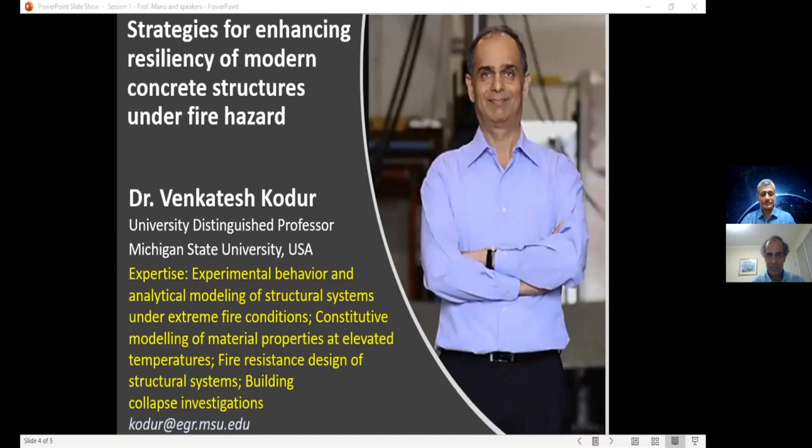Professor Kodur? Yes, can you hear me? Yes, very much. Yeah, sure. Okay, so let me go and share my screen.

Can you see the screen now? Yes, that's correct, we can see it. You can just put it on slideshow mode. Yeah, fine, that's perfect, thank you. Perfect, good, okay, so just one.

Okay, I don't want to say good morning or good afternoon, we are all in different time zones, and I am in Michigan, United States, where it's just past midnight right now, it's 12:30 a.m. So first of all, I would like to thank Professor Gettu, as well as Rilem and Gettu's colleagues, Manu Santhanam and others, for organizing this workshop, as well as for inviting me to be part of it.

So the title, Manu, can you hear me? Yeah, I can hear you. It's clear, sure. So the title of my presentation is on strategies for enhancing resiliency of modern concrete structures under fire hazard. The buzzwords here are resiliency, obviously, modern concrete structures, and fire hazard. So those three are the buzzwords here.

So what I'm going to do today is to just give you some background information on the overall importance of fire safety, specifically mostly in buildings, but in infrastructure, critical infrastructure. Then I'm going to also look at resiliency, why resiliency is much more important in the current or the modern concrete structures as opposed to structures 30 years ago. I'm going to look into that.

And I will illustrate, in addition to that, some of the fire statistics, we call it, to see the magnitude of the fire problem itself around the world. After that, I will move on to a brief mention of various experimental and numerical studies we have carried out to develop techniques and technologies to overcome the fire problems with respect to especially the new concretes. I'm going to discuss some of the critical parameters, and finally at the end, I'm going to quickly point out some of the innovative strategies that can be implemented even in new concretes and new structures to overcome not only the fire problem, but also how we can enhance resiliency.

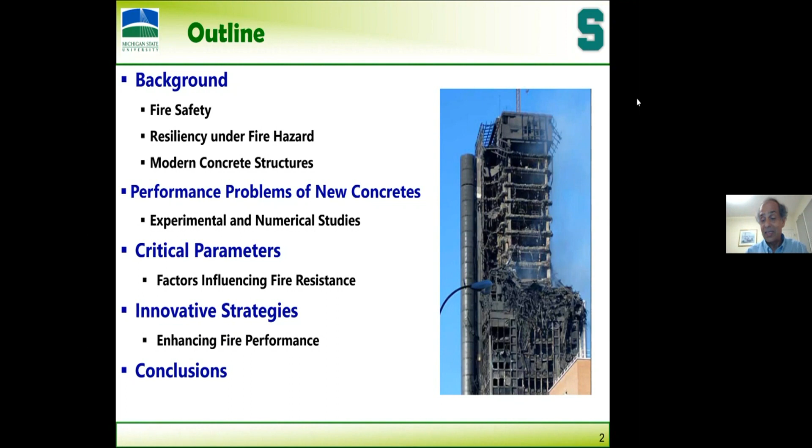As we all know, concrete is the most widely used construction material in most countries, if not all countries around the world. And there are a number of advantages. A lot of times all these advantages are taught very well, even in early concrete courses. But one of them, which is conveniently forgotten, is...

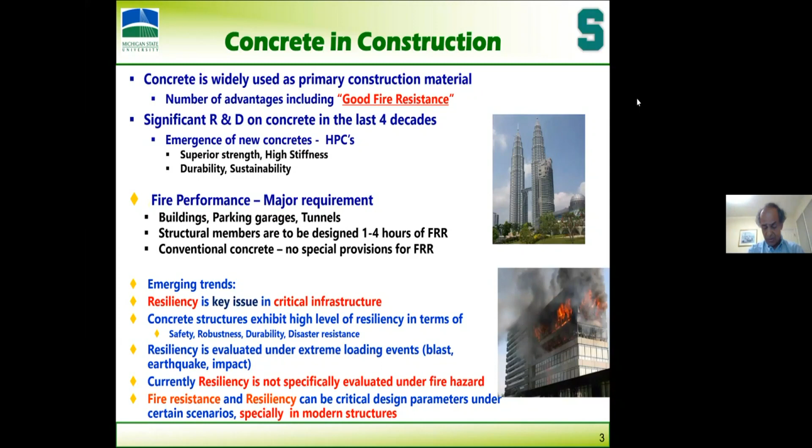It was started because timber or steel has a lot of significant problems with fire resistance. I will define what fire resistance is. So one of the best materials from a fire safety point of view is concrete for structural members. That's why it's widely used as well. There has been significant research and development activity with respect to concrete, especially from the material point of view.

And this has led to a lot of new concretes, such as high-performance concretes, high-strength concretes, ultra-high-performance concrete, fiber-reinforced concrete. Much of these concretes provide very good strength, stiffness, durability, sustainability, you name it, much of the needed properties. However, with the recent concretes, one of the problems is fire, which we will come to in a second.

Before that, fire is a major hazard in the built infrastructure, and especially in buildings because of the life safety requirements. Fire poses a significant hazard and threat to the built environment. And conventional concretes usually have much higher mass and much higher fire resistance, but the same is not true with the new types of concrete, which I'll show you quickly.

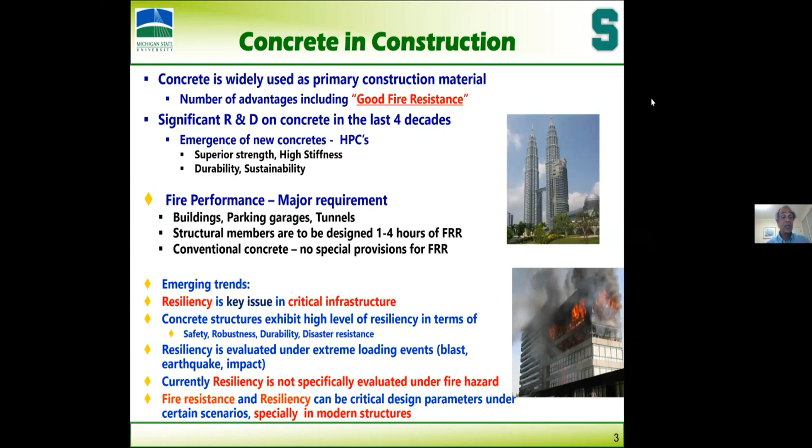Now, the emerging trend over the last 30, 40 years, in most parts of the world, is that resiliency is the key buzzword for critical infrastructure. This includes buildings, bridges, tunnels, whichever we classify as critical especially. So concrete structures exhibit very high levels of resiliency in terms of safety, robustness, disaster resiliency of the different materials.

However, today, in the current way of doing things, we evaluate this resiliency, or check for this resiliency, in critical infrastructure, especially under blast, earthquake, impact, but we don't do it even for the basic things under fire hazard. It's all based on the prescriptive approaches developed 40, 50 years ago, which are present in the codes and standards.

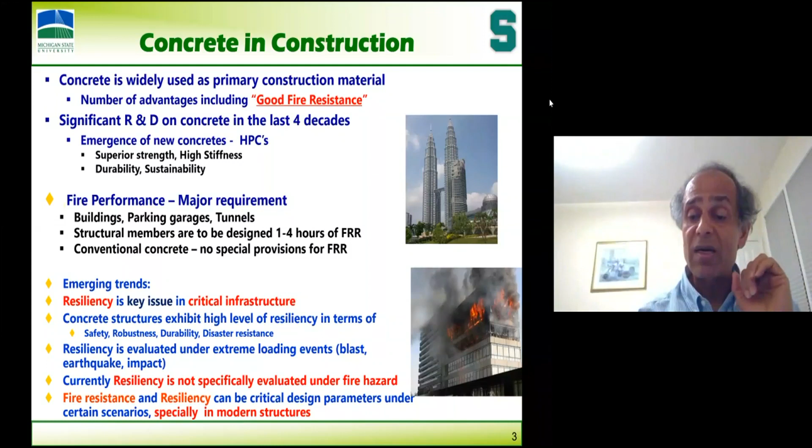It's not in any country, even in the US, for example. These are all tests based on a single test done on columns at Underwriter Laboratories or NRC Canada. Still, we continue to use those provisions which are not really applicable for modern construction. So fire resistance, and basically since we don't evaluate this resiliency specifically under fire hazard, modern concrete structures are susceptible to problems, especially under fire.

Now, I don't want to spend too much time. Fire, as you all know, is a significant hazard in terms of statistics, not only for people but also for infrastructure or structures. This is some of the statistics. In the US, there were more than 1.3 million fires that led to more than $50 billion of damage in 2017, almost about 2% of our GDP.

Now, when fire happens, remember it can start if something goes out of control. Either lightning can start a fire on a bridge, for example, or something going out of control in a kitchen can start an accidental fire, electric short circuit. That's a primary event. Also, fire can start following a blast happening somewhere or an impact. A truck hits a bridge, that impact doesn't do much damage. The bridge is designed for that, but it's not designed for the fire which follows that.

9/11, the buildings were designed to account for the impact loading of a smaller aircraft, not that aircraft. I was part of that investigation, and when we looked at it, it was never designed to account for the fires that ensued the impact loading. Similarly, even floods can lead to fires, as happened in New Jersey in 2012 during Hurricane Sandy. So as a secondary event, fire can do much more damage than the primary event itself.

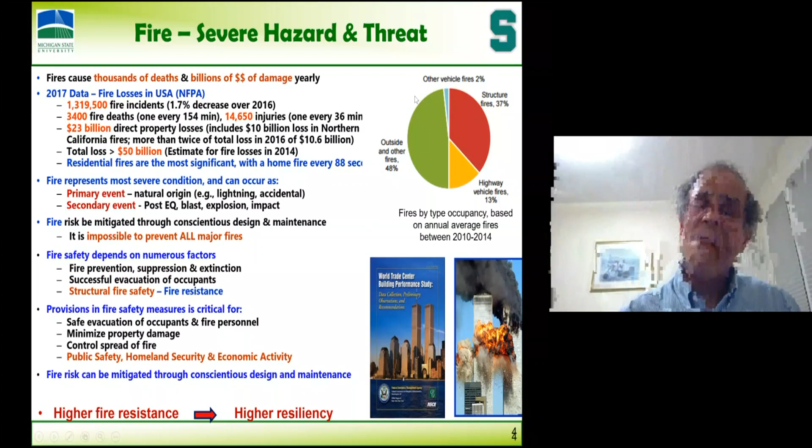Now, there are a number of fires around the world. These are some of the recent fires in the United States. For example, the damages which happened in November 2018 California wildfires is more than $3 billion for structures, and more than $26 billion of insurance was paid out because of that. This was not major structures because it was outside the towns, but there was some kind of damage to some structures as well.

Now, in addition to that, 9/11, obviously you all know much more about this. There were bridge fires in the United States, tunnel fires, for example, warehouse fires. So fires do happen, like the Oakland warehouse fire, where 36 people died, again in Oakland, California. And in this case also, there was significant structural damage.

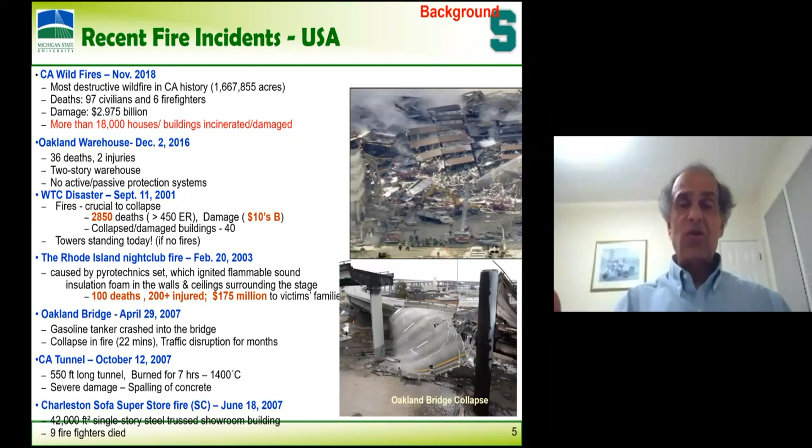Now, I'll just illustrate quickly, there's not much time in today's presentation, but quickly illustrate how things can go wrong. This is the I-85 bridge outside of Atlanta, Georgia, near Atlanta airport. On a fine spring day in 2017, what happened was they put in underneath the bridge, for drainage repair, a lot of pipes, PVC, polyvinyl chloride pipes. And then they left it and went, because they wanted to start the work in late April or May. All these pipes were left there.

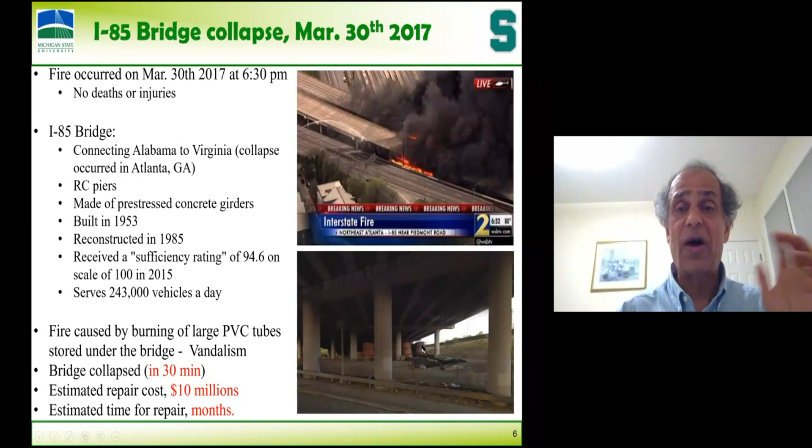A homeless person, on a cold evening, comes in and sets fire to all the rubble or paper which was around it. And then that goes out of control and spreads into the pipes, and a huge fire starts. Look at this fire — the fire department, because it was closer to the city, Atlanta, a lot of fire engines or firefighting trucks came, but it couldn't be fought. They had to withdraw because of significant spalling. You can see here the rebars completely exposed, and spans of the bridge collapsed.

You won't believe how much damage. Delta had to cancel about 1,000 flights over the next 3 days or more because nobody could get to work — all the flights. That's the hub of Delta, the world's largest airport, basically. So I think that's the kind of damage that can happen, and it took weeks for the bridge to be rebuilt. There are a number of buildings like this.

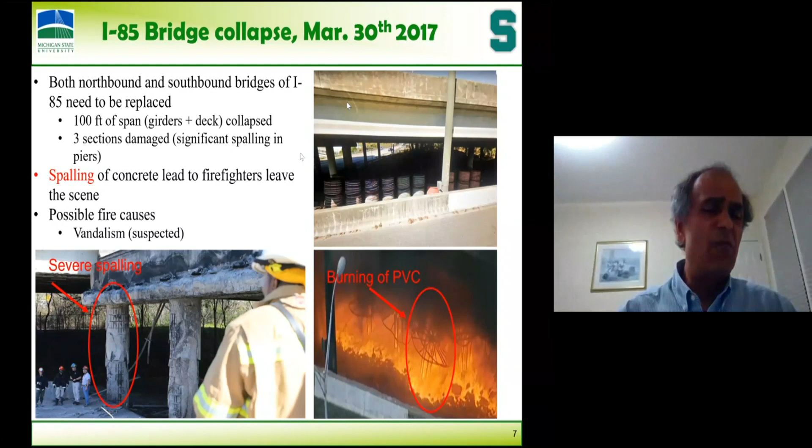I can name hundreds of buildings which were on fire in the last 5 years. Important buildings: in Tehran, the Plasco building, a 17-story building, collapsed. A number of firefighters died as well as people. Grenfell Tower, you know what happened there, a concrete building. The first one was a steel building.

I was part of the investigation at Delft University of Architecture, a university building, 13-story building which collapsed because fire started due to an electric short circuit in a coffee vending machine which was not turned off. So there are a number of fires in buildings, it's a real hazard which we are looking at.

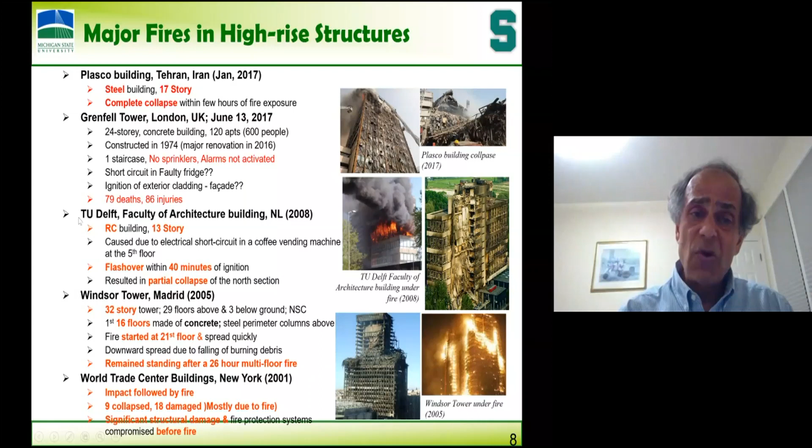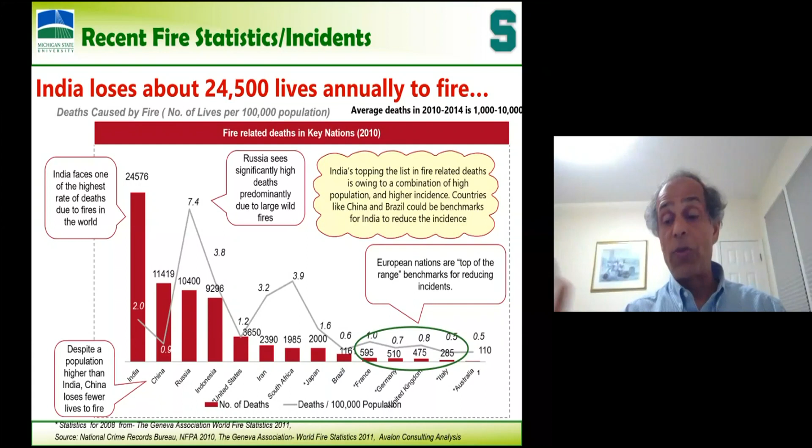If you look at the world statistics, India especially has the worst fire record. Nearly 24,000 people die every year because of fire incidents. It may not be due to structural damage, but fire as a whole has to be considered a hazard. A lot of times smoke is the one which kills more people than anything to do with the structure itself.

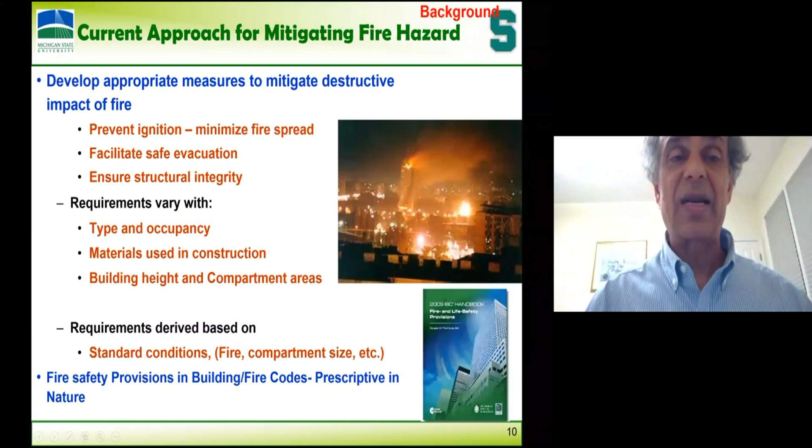How does the current code address this? Current codes address this by putting in a lot of fire protection measures, and this depends on the height of the building and the type of occupancy. For example, if you have buildings with old age people or hospitals, you obviously need to provide higher fire resistance, it should stay longer than an office building. These are put in place in the building codes, including in India, and every other country has this. Without that, you cannot get a permit for the building.

What are the fire safety strategies? We put in a lot of measures, sprinklers - fire comes out, it should be put out by sprinklers automatically. Most new buildings in the United States are sprinklered, but often sprinklers are not effective, so people have to be sent out. Then you have fire contained to the source of origin in one compartment, one room or two rooms, through barriers, or your structure has to stand up until the fire is fought. This is what is called fire resistance.

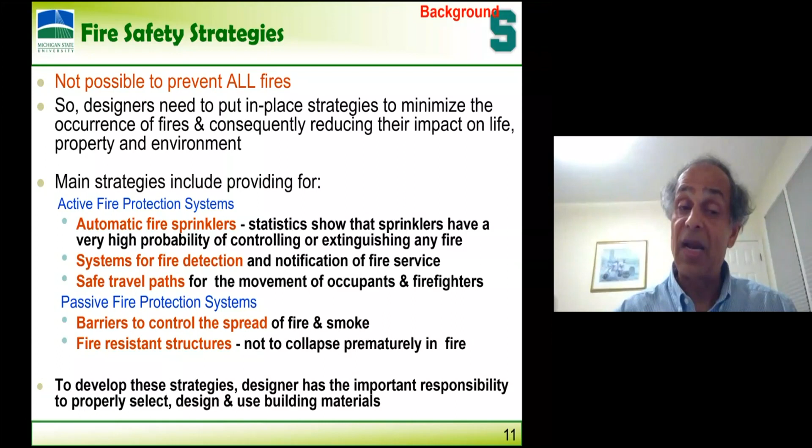Depending on the height and the occupancy type, you need 1 hour, 2 hours, 3 hours, or 4 hours. Under the so-called standard fire, the building has to stand up. I will skip this slide.

So fire grows something like this. Just remember, nothing happens to the structure here, I'm talking more about structure. People should get out at this time. But for the structure, this is the part where structural fire resistance comes into play. Typically you need 2 to 3 hours of resistance in the structure so it doesn't collapse under fire.

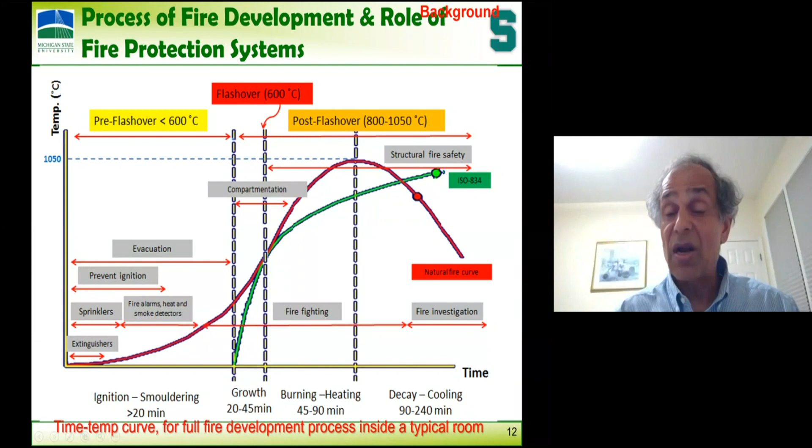This fire resistance depends on a number of factors, including what kind of fire you have, and the type of materials - whether it's concrete or steel. You can see this is loss of strength with temperature. Different materials lose strength at different temperatures, so all this has to be accounted for.

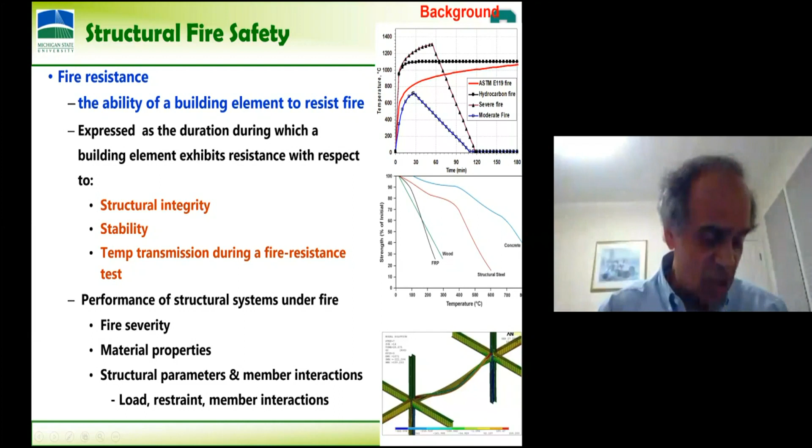Current provisions, if you take conventional concrete, are really very prescriptive. Much of this is developed based on 1960s and 70s concrete types and technologies. As you can see, all you need to do is provide a certain cover thickness to the rebars, because steel is the weaker part in the slab, or in this one as well. As long as you have sufficient cover thickness to the rebar, you've achieved a certain fire rating. More fire rating, or more fire resistance, you typically get with a higher cover thickness.

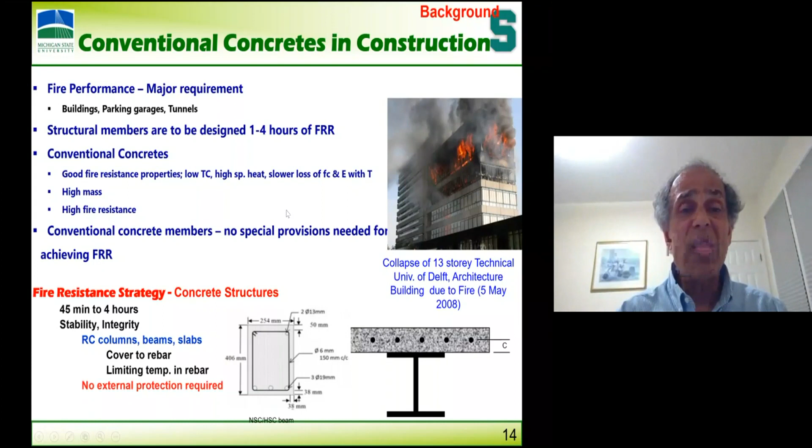American codes are so prescriptive, there is no other way of engineering the system right now. For 1 hour, as long as your dimension is 8 inches minimum, that's 200 millimeters, you get 1 hour in a column cross section, and you need to provide 1 inch concrete cover for a 1 hour rating. For 1.5 inch concrete cover, as long as your minimum dimension is 9 inches, you get a 1.5 hour rating, and so on. As simple as that, which is not realistic.

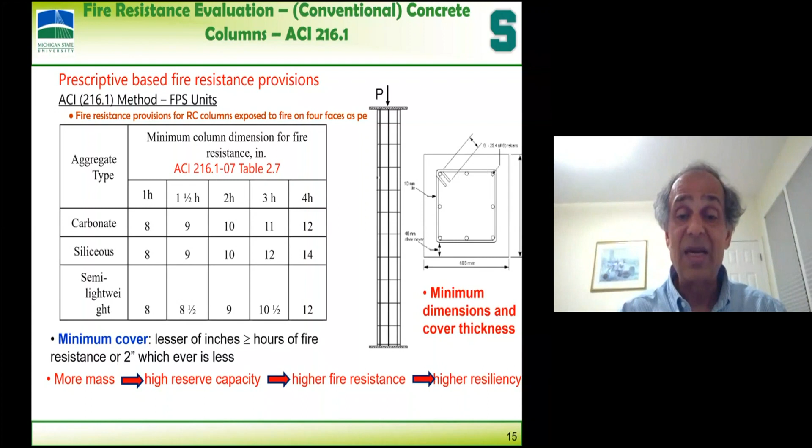Now what about Eurocodes? Very much similar, look at this. In one table they cover beams, columns, slabs, and walls, same approach, very prescriptive.

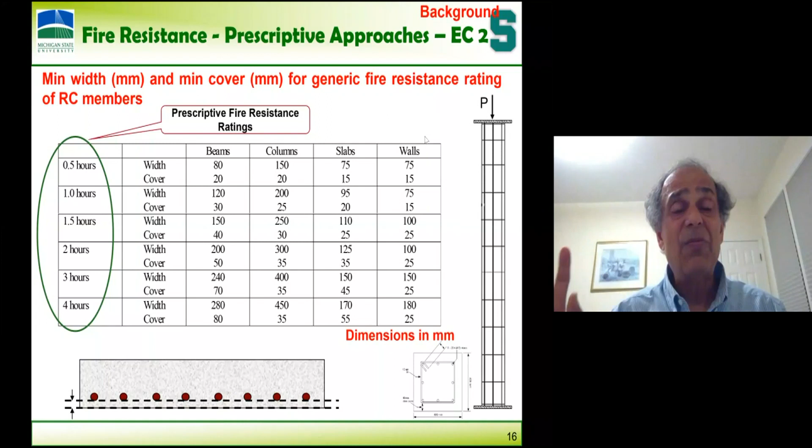Now I have to move on quickly because of time. Modern structures pose significant problems because they are typically taller compared to 70s, 40s, 50s structures, and they are leaner - I'll show you that - and they are made of newer types of materials. The newer the materials, the lower the fire performance, and we have increased demand on modern structures because we use nonlinear analysis and all this to make the structure very slim. So the current codes, typically, if you take the modern structure, have lower fire resistance compared to the equivalent structure of yesteryears.

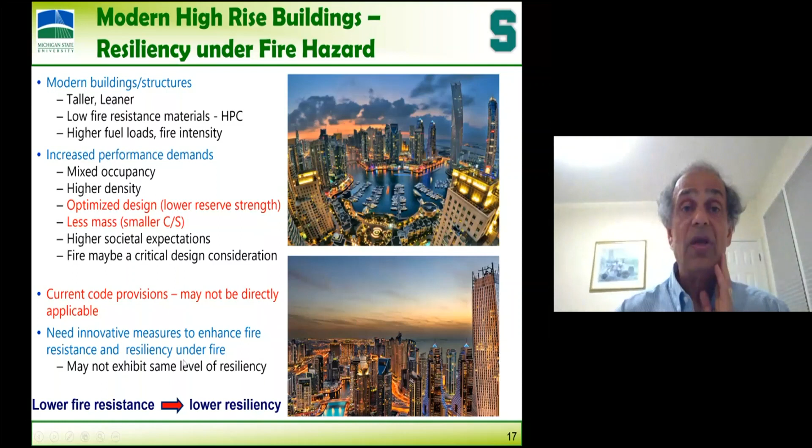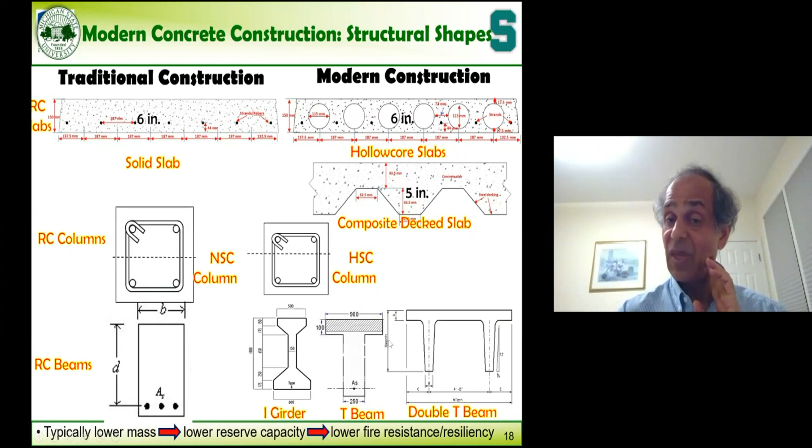Now look at these modern slabs, how different they are. If you take a solid slab, a hollow core slab, or a column, look at how small we are building with higher strength concrete. Same thing, we are using this type of shapes. Similarly, our concretes have much more problems because we increase the concrete strengths and it comes with lower permeability.

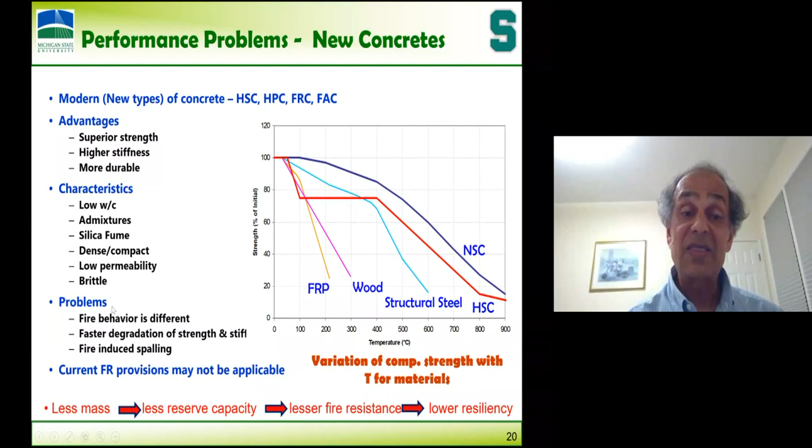It's susceptible to two things. One is the strength of the newer concrete - see this red line, this is how the strength drops with temperature. Look at the normal strength conventional concrete, it slowly drops. So this is the major problem. The second bigger problem is the occurrence of so-called fire-induced spalling.

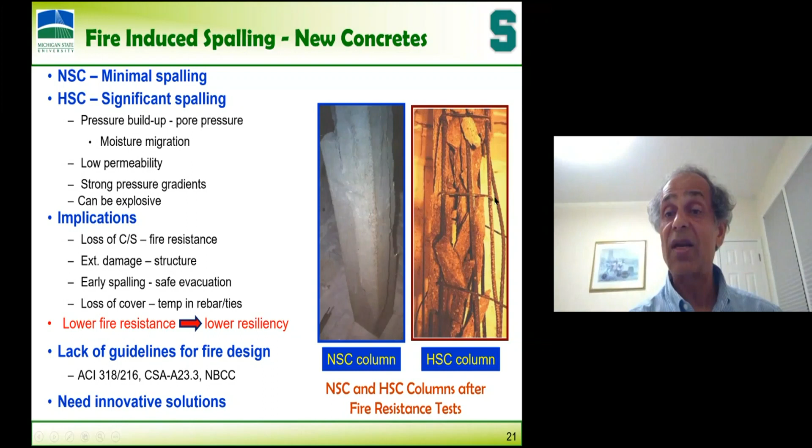Look at a concrete column, 6 hours in a fire which I tested, nothing happened, 16-inch column. This is a typical column used in Chicago. And look at the high-strength concrete column, failed in 19 minutes. This was done for Portland Cement Association and Construction Technology Laboratories. I did these tests at NRC, about 15 columns were tested for them, in addition to a number of other things. So we developed a lot of guidelines.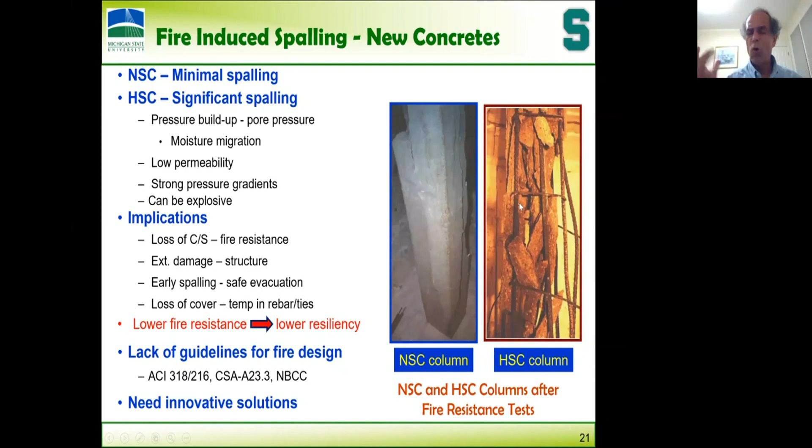So this spalling, basically why it happens: buildup of, when it's exposed to fire, this has lower permeability, moisture becomes vapor, it can easily get out here - 10 to the power of minus 16 is the permeability. When you reduce it by 100 to 1000 times to 10 to the power of minus 18, that pore pressure converts into tensile strength and pushes this out. So boom, boom, boom, throughout this fire scenario, you will have spalling.

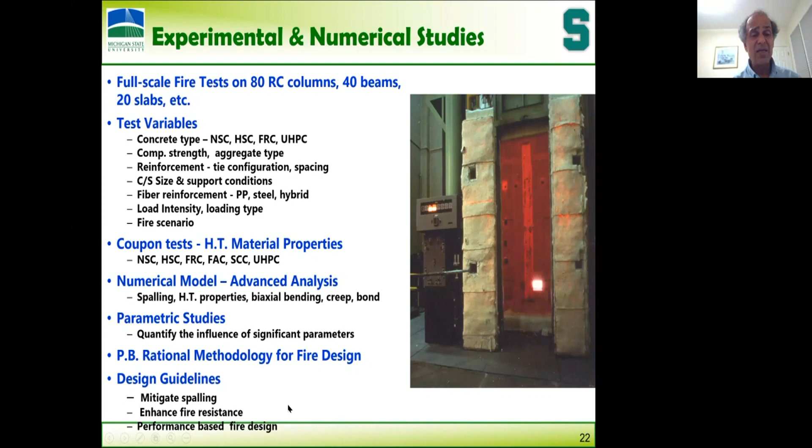And this spalling can reduce fire resistance significantly. We did a number of tests, and we did the material property tests. Over 30 years of my research is focused on this, first at NRC Canada and then at Michigan State University now, and we have developed about 15 PhDs so far who have graduated on these related topics.

So we have developed advanced analysis models, and recent work has been to develop much more guidelines as well as with ultra-high performance concrete. See, the concrete, as I said before, current codes say only cover thickness is the issue, the size of the member, but it is affected by so many factors - strength of concrete, reinforcement layout, density of concrete, type of aggregate, whether you're using limestone or quartz. So there's a number of things.

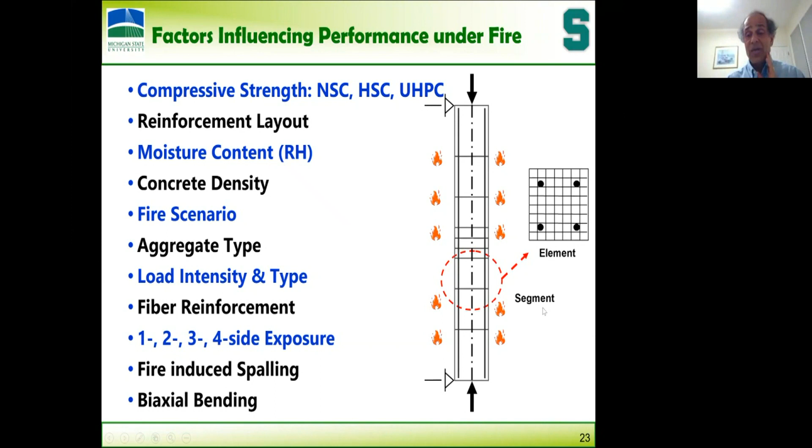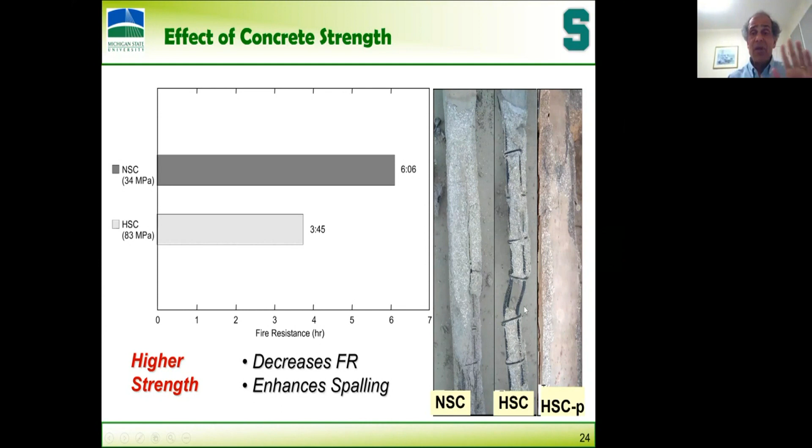As you can see, higher strength concretes, conventional concretes - but if you add fibers, you can significantly minimize this spalling which is happening. Okay, so another thing is if you bend the ties, it enhances fire resistance significantly. Bending the ties at 135 degrees, this we did for PCA and this is in American codes right now. You can reduce spalling significantly even with higher strength concretes.

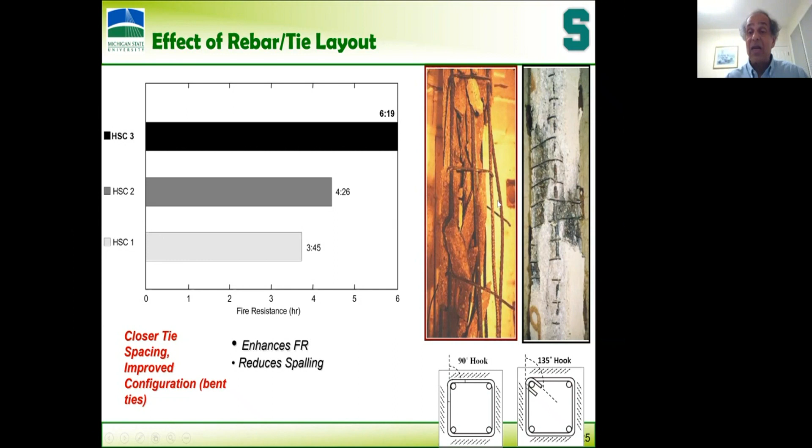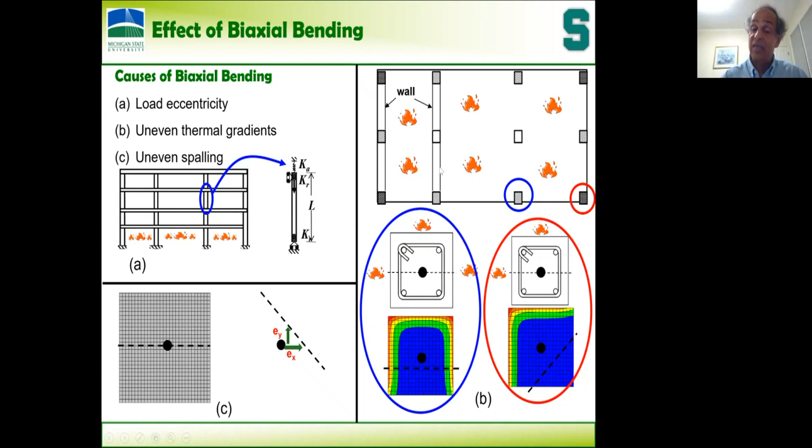Then concrete, when it is subjected to a column, for example, when it is subjected to concentric loading under fire, you have spalling happening in different sides. So that means your concentrically loaded column becomes eccentrically loaded, either due to development of thermal gradients when only one side, two sides, or three sides are exposed to fire. So a two side exposure to fire, two adjacent sides exposed to fire, can be much lower fire resistance than a four side which is exposed to fire. This can cause significant problems in real life.

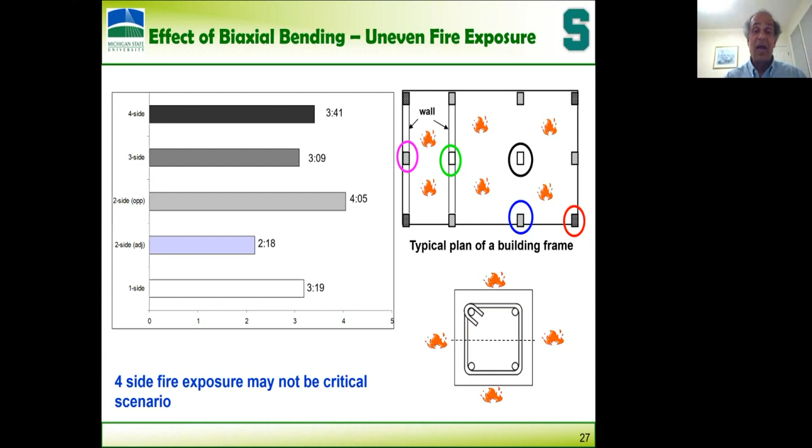Okay, so let me skip this. How can you overcome this? If you can add polypropylene fibers - these fibers are 0.1 to 0.2% by mass, by volume - they melt at early temperatures of 160 degrees and increase the permeability, or create pores where the pore pressure can easily be dissipated. If you add steel fibers, it increases the tensile strength and significantly overcomes the pore pressure. It withstands the pore pressure so that there is very little spalling.

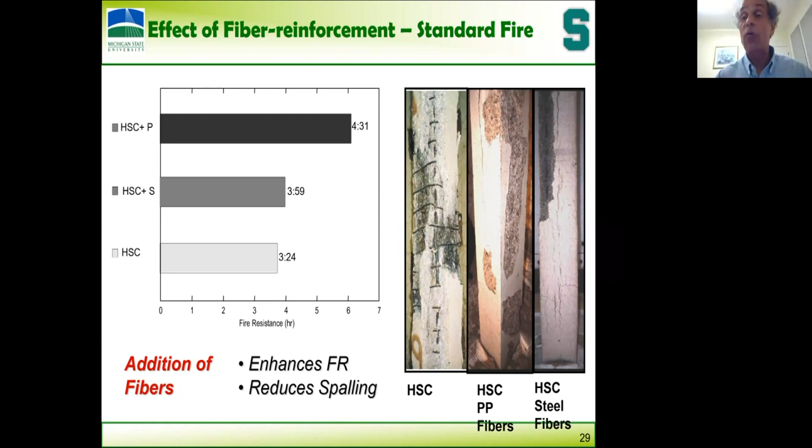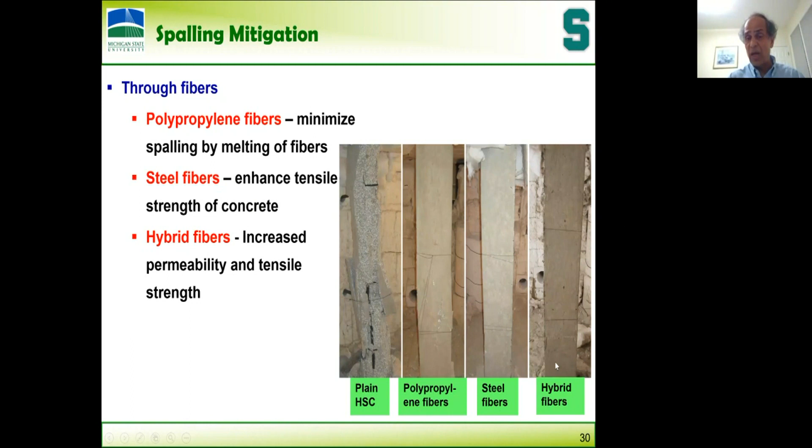Okay, you can do a few other things. So look at the columns we tested - these are all tested in the lab. Plain concrete, polypropylene fibers, no spalling, steel fibers, very little spalling, as well as hybrid fibers. You can change the configuration.

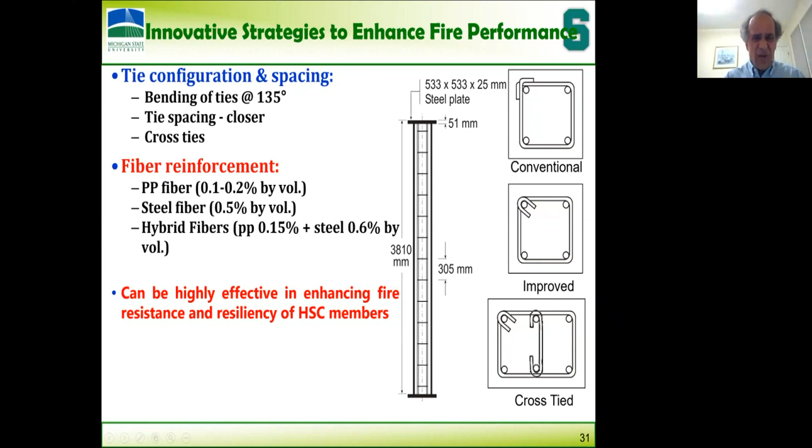If you provide the ties like this, it does wonders. It increases the fire resistance. Instead of failing this column in fire at 1.5 hours, it can go up to 4 hours by just bending these ties or by providing cross ties. Okay, and there are very minor other things like changing the aggregate and stuff. I'm not going to get into this.

The last point I want to make is that you have to engineer it and you have to use advanced analysis approaches wherein at a system level, you need to account for the realistic fire which can happen in a structure, realistic material properties - if it is high strength concrete, high performance concrete, ultra high performance concrete, whatever it is. Then you have to account for this spalling and other things which are very complicated even at this stage. These are all PhD topics, for example. There is very little data.

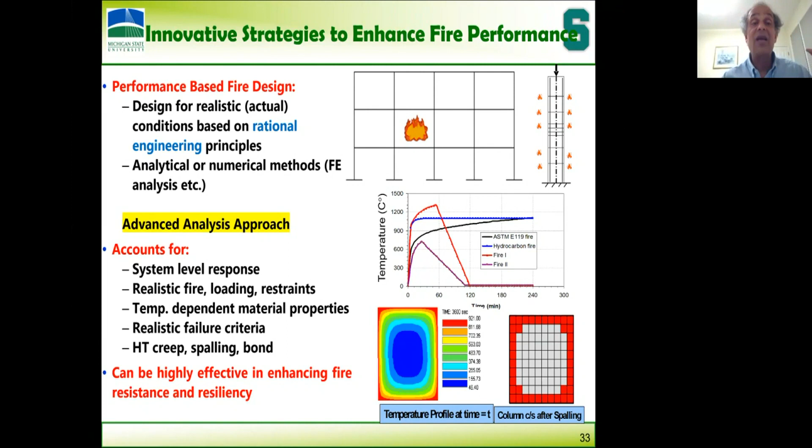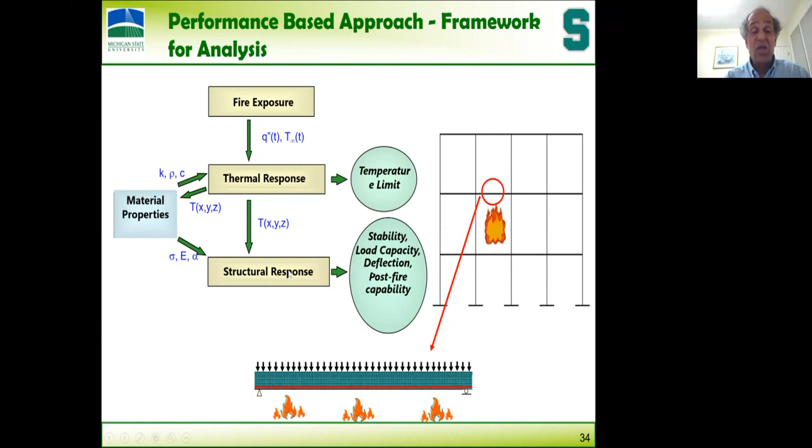And then you can carry out the analysis, first finding out the fire scenario, then finding out the temperatures, and then calculating the structural response. You include all your spalling, creep, bond degradation—everything changes with temperature. That's where the complexity gets in.

Okay, so we have done a lot of this. It's published in a number of journal papers. But let me conclude here.

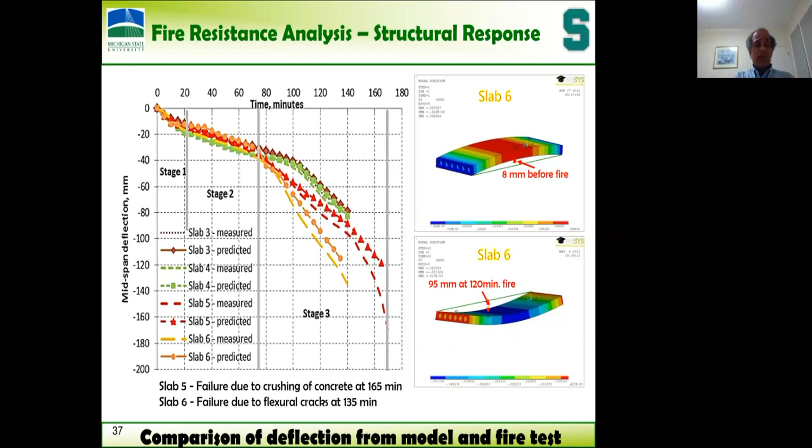Resiliency of structures should be one of the critical considerations under fire hazard, especially with modern concrete construction. There are very few problems with respect to conventional concretes, but the same cannot be said about the modern concretes. High-strength concrete structural members, as well as ultra-high performance concretes, exhibit lower performance as compared to conventional concretes, as well as significant spalling problems.

So you have to engineer the system through advanced analysis. We call it performance-based design, but you have to use advanced calculation models so that you can develop unique strategies for overcoming this. As I showed you, simple modifications such as tie configuration or fibers can help in overcoming this problem.

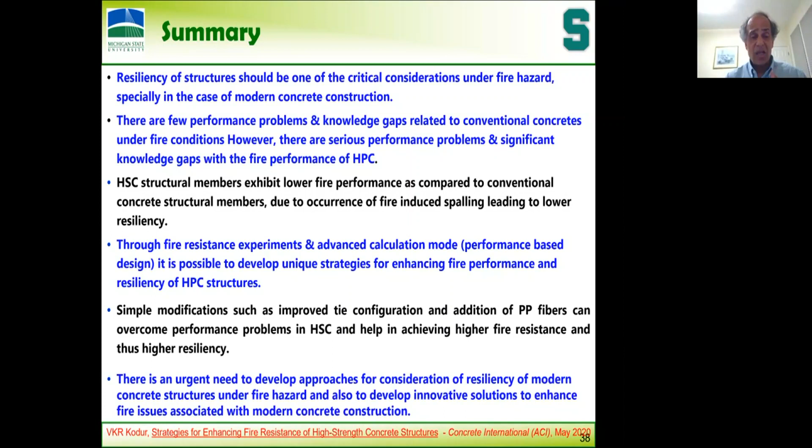This is one of the recent articles in ACI, a very general article in Concrete International. There are a number of journal papers associated with this.

And thank you all for your attention.

Well, thank you very much, Professor Kodur. Indeed, that captured many different aspects about concrete structures' resistance to fire. Of course, as you said, the time was limited to really discuss everything in detail, but I think what you presented gave across a clear sense of understanding of what needs to be done to improve resiliency in buildings with respect to fire. We have a few questions.

Of course, as expected, one major question is about the World Trade Center collapse, in terms of what was the phenomenon that ultimately led to the collapse. So your thoughts on that in just a few words.

Sure, so basically, in simple terms, all this was due to fire. When fire happens, especially the major defense for firefighting could not happen. Sprinklers did not work in the World Trade Center because it was not meant to be for that kind of fires. The third defense we have—so sprinklers gone, firefighting didn't happen—was structural fire safety.